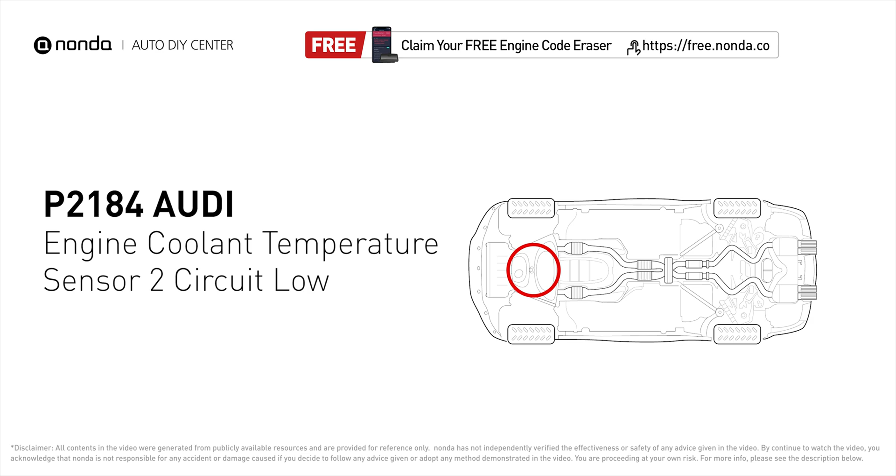It is a code for the engine control module detecting the ECT sensor number 2 is indicating the low range and does not correlate with ECT sensor number 1. Here are 3 of the most practical solutions to fix Audi's P2184 error code. Method A. The ECT sensor.

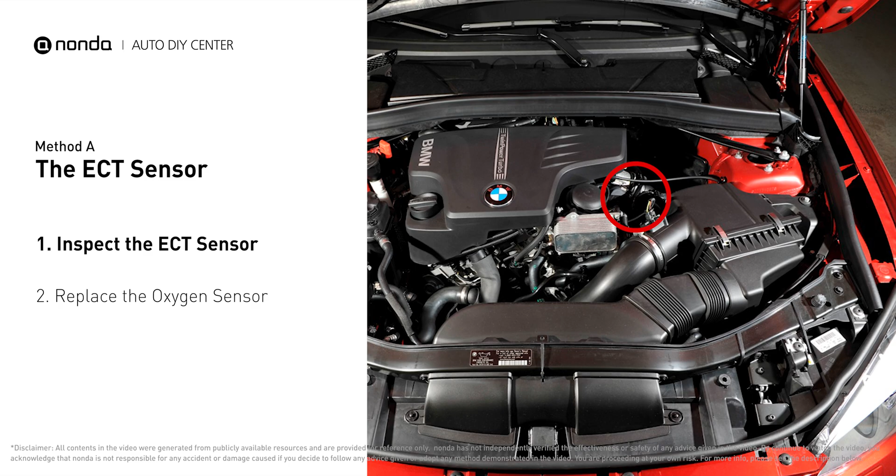In most cars, the primary ECT sensor is installed near the thermostat in the cylinder head. Remove the ECT sensor from the engine. Use a multimeter to proceed with a test on the ECT sensor. At the ambient temperature of 68 degrees Fahrenheit, the sensor resistance is between 2000 ohms to 3000 ohms.

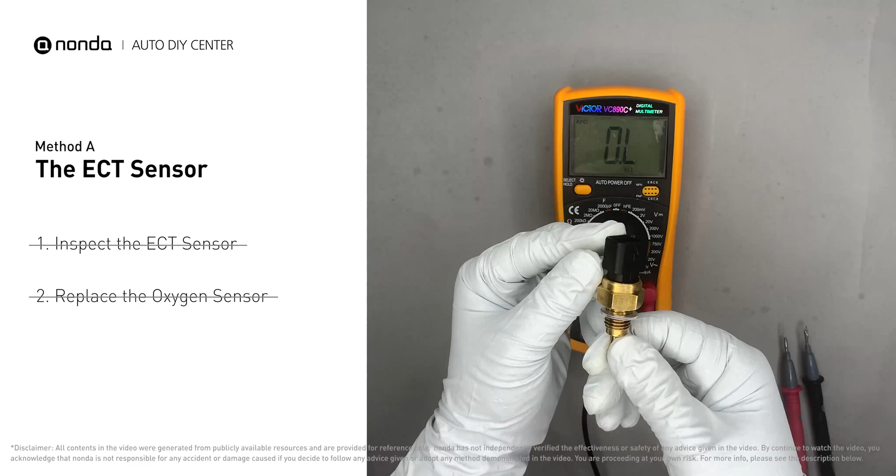If you do not get a reading, this indicates that the ECT sensor is faulty and needs to be replaced. However, if the ECT sensor has a correct reading, then we will proceed with Method B. Method B. The engine coolant.

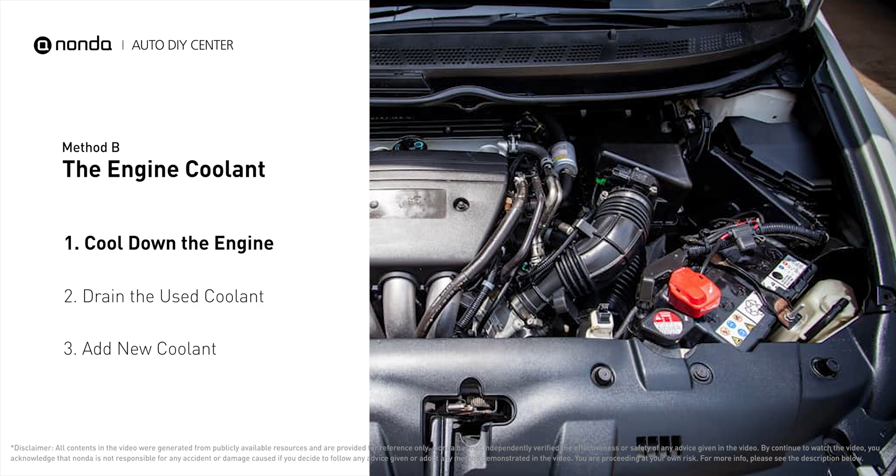Engine coolant reservoir is often a translucent white bottle, and the radiator is the large panel at the front of the car. Cool down the engine and remove the radiator cap. Locate the radiator lower hose. Place a container underneath the hose. Remove the hose and allow the coolant to drain.

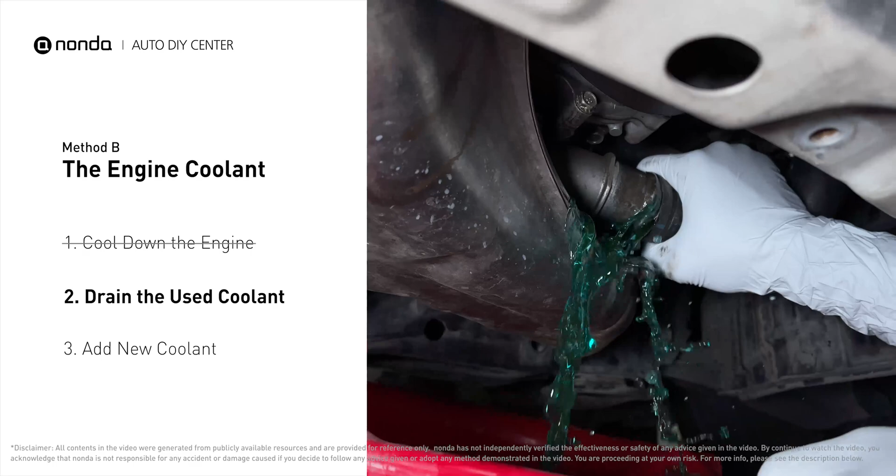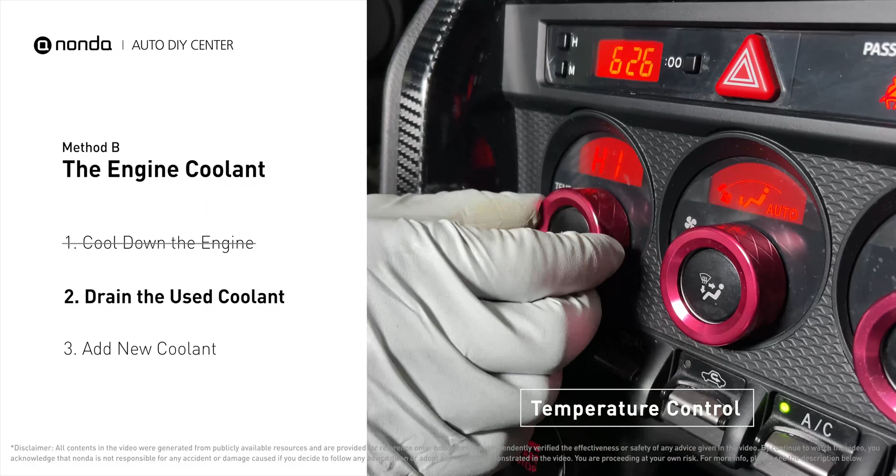To better drain out the used coolant, start the engine and turn the temperature control to maximum heat. Closely monitor the coolant temperature gauge on your dashboard to prevent engine overheating. Once the used coolant is drained out completely, turn off the engine and replace the hose.

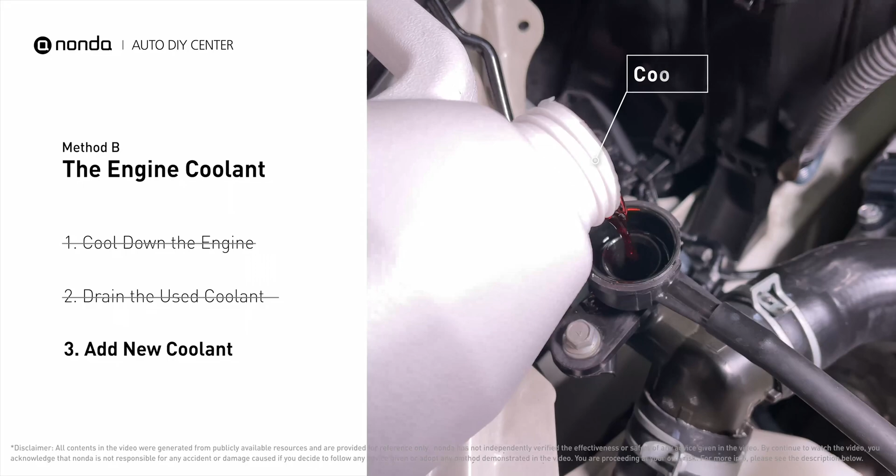Next, add fresh coolant to the radiator until it reaches the base of the filler neck. And then take off the cap of the coolant reservoir, fill it with fresh coolant, not exceeding the full line, then replace the cap.

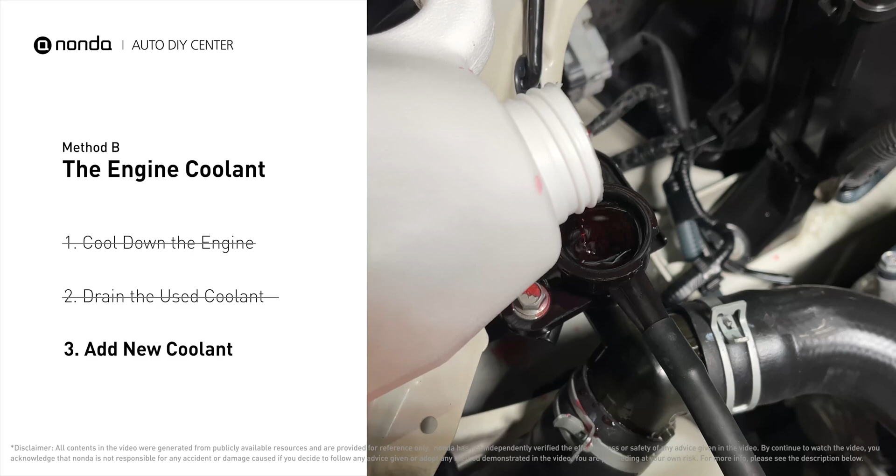After filling, start the engine and let it idle for a few minutes to let the system purge all the air out, and then add coolant as needed. Replace the radiator cap.

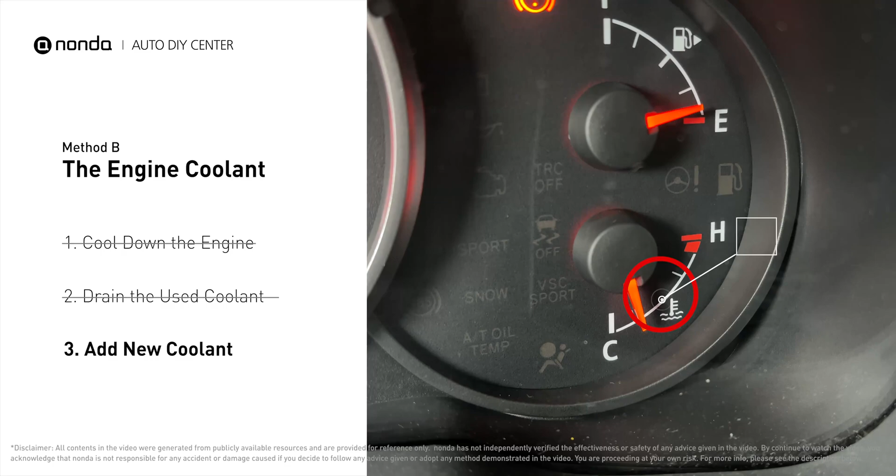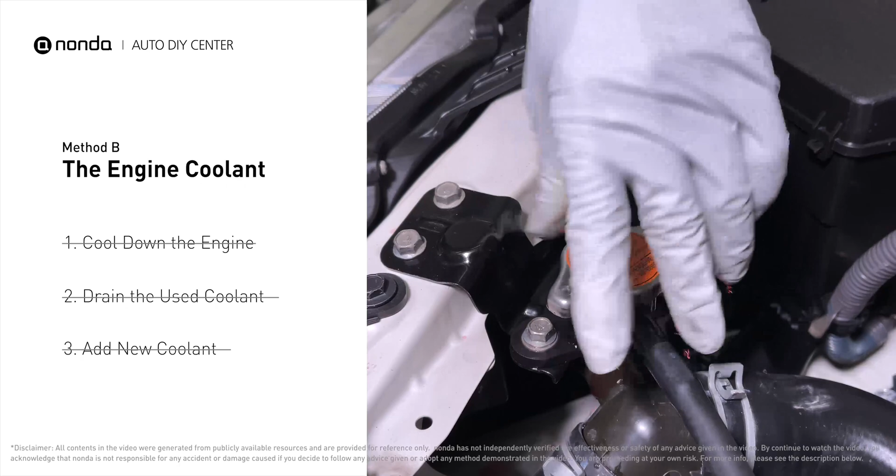Closely monitor the coolant temperature gauge on your dashboard. Once the coolant temperature reaches 190 degrees Fahrenheit, turn off the engine. After the engine has completely cooled down, remove the radiator cap and add coolant to its full level. Method C. The thermostat.

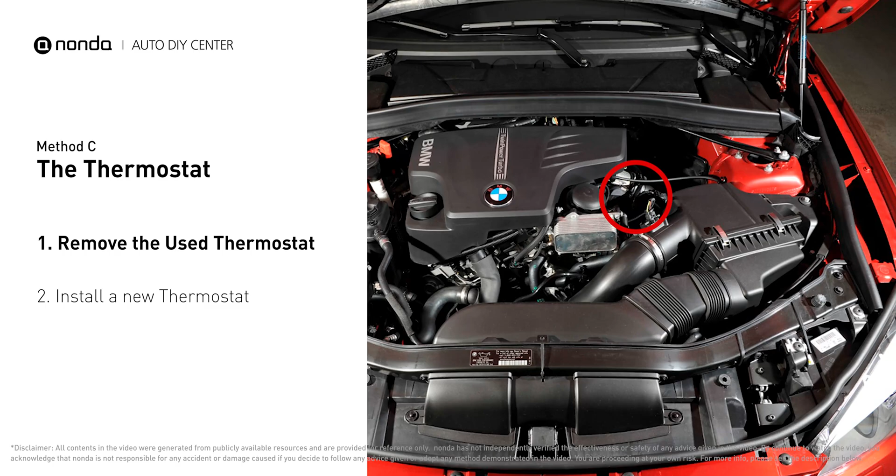In most cars, the thermostat is placed near the water pump on the cylinder head. First, carefully remove the thermostat from the engine. The engine has to be cool before attempting the process, and then install a new thermostat.

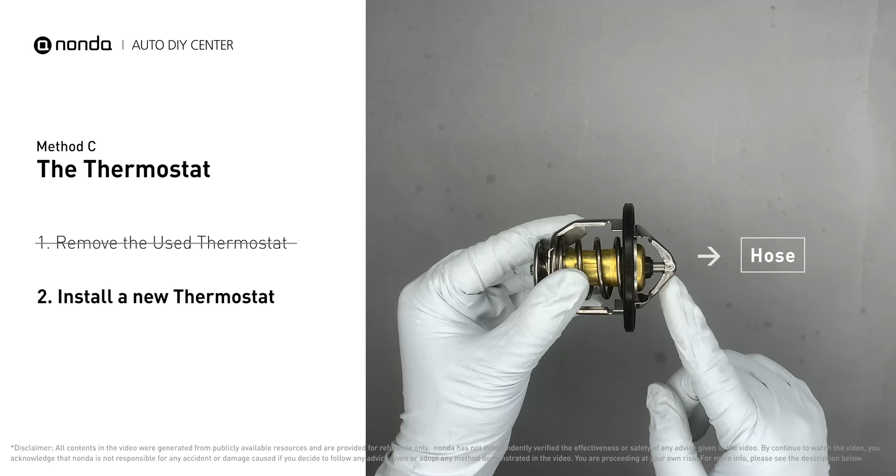To install it correctly, you need to make sure the short end goes toward the hose and the deep end goes towards the engine. When you install it back to the engine, make sure the jiggle valve is pointed straight up to the top of the engine so the air can get through the system.

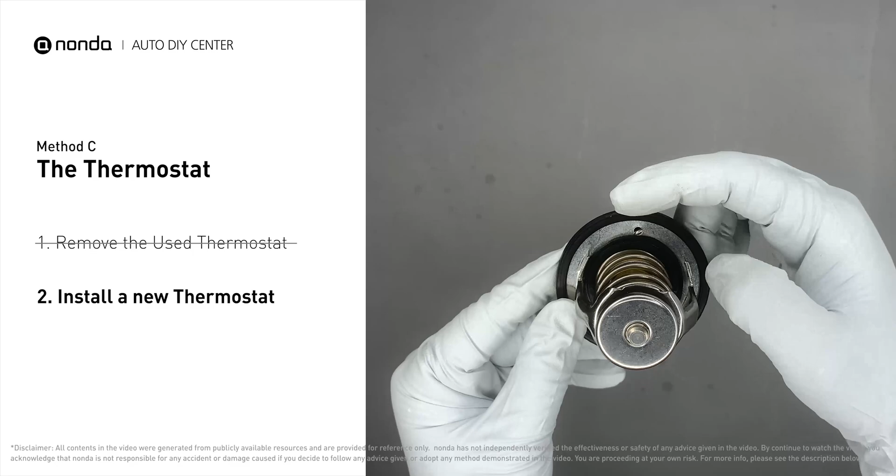So here are 3 of the most practical solutions to fix Audi's P2184 error code. After the repair, you can now use the ZUS app to clear the error code. And tap the rescan button one more time to make sure everything is fine with your vehicle.